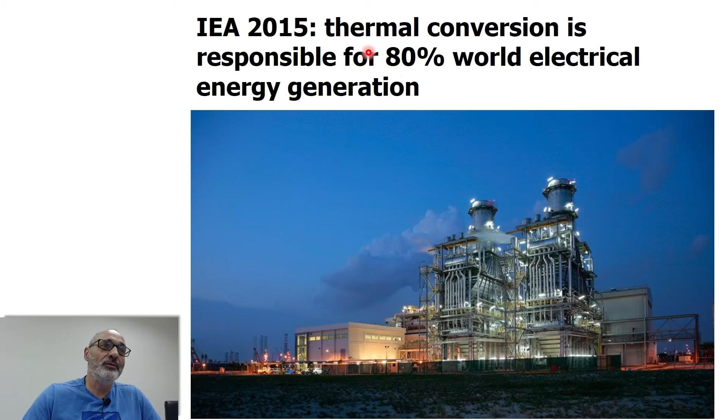Okay, so why this is so important, why I said that this is a very important subject. You know that most of our electrical energy, the world electrical energy consumption, comes from thermal conversion. I mean conversion of thermal energy into electricity by some special methods, which we will elaborate further on. Okay, so I just put this reminder here: 80% of the world's electrical energy generation comes from thermal conversion. Various types of technologies for thermal conversion, which I will try to elaborate.

Okay, to elaborate a little bit more on this subject, let's take this very recurrent figure. I'm going to be showing you this figure several times during this course. This is the U.S. energy use in 2013. Actually, this is a very interesting figure because first it's a Sankey diagram, so we have a very good idea of the sources and the destination, the uses of energy. Okay. And well, it's also representative of the world's consumption, the world average consumption, because you know the Brazilian grid, the Brazilian matrix, as we say here in Brazil, is kind of different. So that's why I use sometimes these kind of pictures.

So you can see in a Sankey diagram, you have the energy sources: solar, nuclear, hydropower, wind, and so on. And on the right, you have the destinations, or the sectors that are consuming energy. You see the residential sector, commercial, industrial, and transportation. So when you look at electricity generation and when you look at the sources, first of all, you see that you have nuclear energy, which is also a thermal source. You have hydropower and so on, which is not a thermal source, okay? And the same thing you can track, for instance, the using in industry. You use a lot of natural gas in industry. So that's how you interpret this kind of graph.

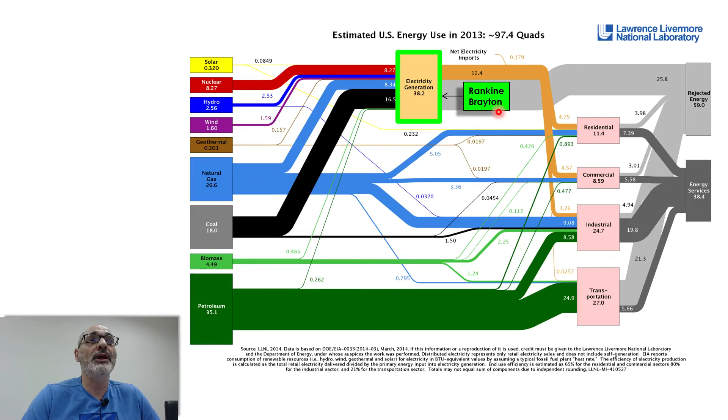But if you look at the sources of electricity generation, the main sources, you see nuclear is a non-renewable source. In a strict sense, it's non-renewable, but you have supply for thousands of years. Okay, but you see, natural gas and coal are non-renewable sources, and they play a very important role in electricity generation. You also have hydropower, wind power, and a little bit of biomass here, which are renewable sources

for electricity generation. If you look at the transportation sector, which is not electricity, but also uses thermal cycles like the Otto cycle, the diesel, or even the Brayton cycle, the major contribution comes from petroleum. So petroleum is essentially a fuel source for the transportation sector. You see a very small amount of electricity being used in the transportation sector, 0.0257, which is for electrical trains, for instance, like it is shown here. So you see that you have a lot of thermal conversion here. Also here, see what's not thermal conversion is electricity and possibly wind, but it's not significant.

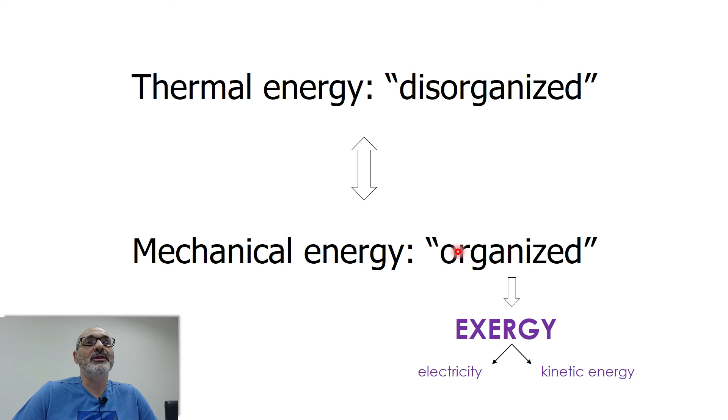So what is the problem when we try to engineer systems for this conversion? We're going to answer this today, and it's related to the second law of thermodynamics, which I'll show you in a few slides. It's also related to what we call the arrow of time - the fact that time always moves forward is related to a certain limit on the efficiency of this conversion. That's a quick glance at what we're going to see further on.

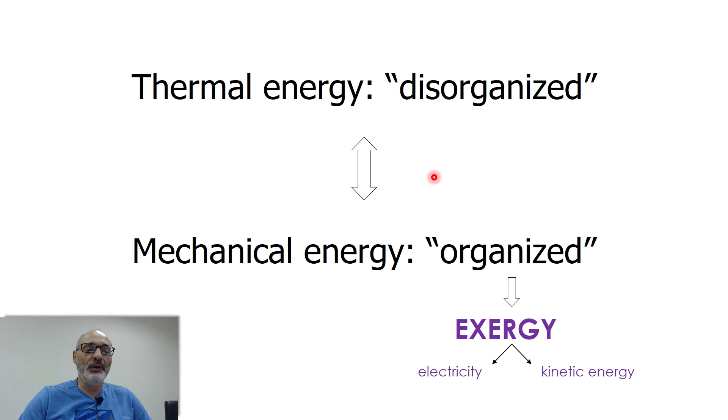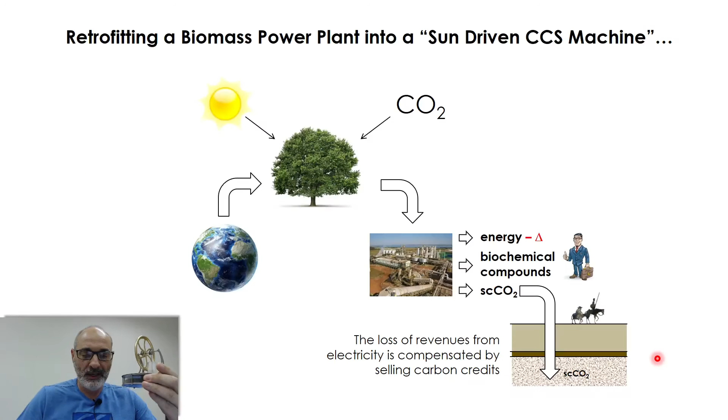I also want to show you a demonstration of thermal conversion. I brought this small machine here - I don't know if you can see it. This is actually what we call a Stirling cycle - a Stirling machine, a machine for the conversion of thermal energy, which may be coming from the person's hand here. It takes heat from the hand of the person holding the machine and converts this heat to kinetic energy.

I brought some hot water, and I'm going to show you how this works in a few seconds, because if I use the heat of my hand it's going to take a while for the machine to start turning. I'll leave it here for a while and move on, then stop to show you the machine working. Heat is being converted - heat from the hand or from the bottle, I hope you can see it here. Let me see if the YouTube viewers can see that. Yes, they will. So heat is being transformed into kinetic energy, and that's the subject of today's class.

We're going to write down all the equations and so on. Let me see if it's already turning. Yeah, so you see it's getting heat from the hot water, and it's not working yet, but it will in a few moments. I'm going to move a little further, then stop to show you the demonstration.

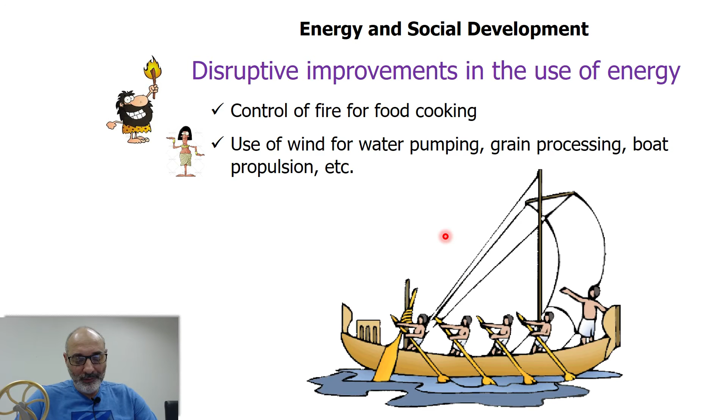And if we leap to only 200 or 300 years from today, we see that during the Victorian era, we learned how to do this conversion of thermal energy, which is a very abundant and easy to get source of energy, to work. When I say work, I mean force times displacement, mechanical energy. Okay, so we learned how to do that during this period. We're going to see that in a little while.

And after learning how to convert heat to work, we developed general purpose engines, also machines like mechanical looms, tractors, excavators, and so on. This evolution here actually revolutionized our society. Okay, the control of fire represented a revolution in our evolution. You know, I said in the first class that even our brain was configured differently because we had access to a lot more food. But these changes here during the Industrial Revolution actually completely revolutionized our society. I'm going to show you that in a few slides.

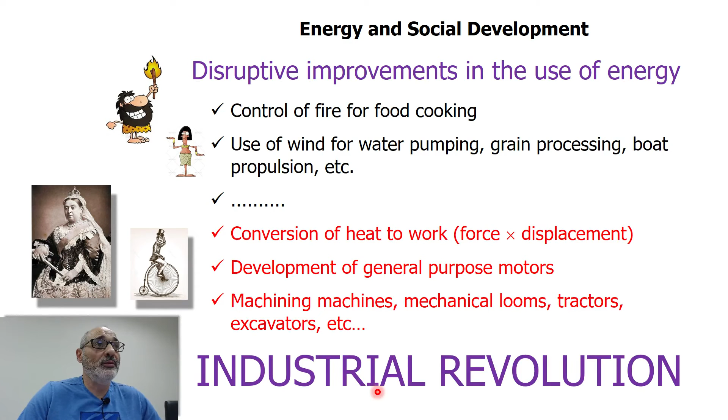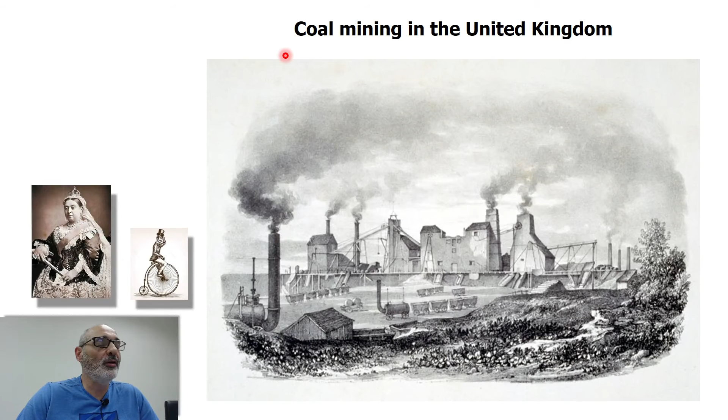Okay, so coming back to our slides and moving on, these changes here resulted in what we call the Industrial Revolution, one of the aspects of which I want to focus on, thermal energy conversion. We could say that it started in the United Kingdom, in the coal mines. Now you see it here. The problem in these mines was that you start digging deeper and deeper, as you can see here. As you started to dig deeper and deeper to get coal, water started to seep and accumulate in these galleries. So you have to have some kind of system to drain this water from the underground in order to enable the miners to work and to get the coal.

Okay, so in the beginning, this water drainage was done by animals or even by humans, but as these mines started to grow, animals or man didn't have enough power in order to remove the amount of water that was increasing and increasing. Okay, so the first thermal machines were developed. As you can see here, we're going to see the machine, a cable which goes down to the mine, and you see the coal here being fed to the thermal machine.

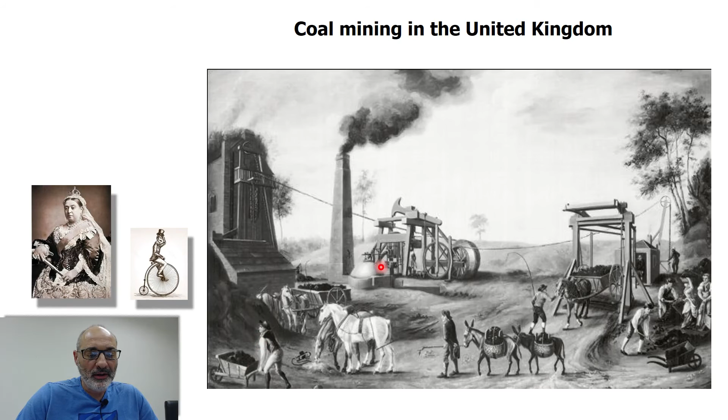The first of these machines was Thomas Savery's machine. The important point is the date, 1698. Actually, it was a very strange machine and a very inefficient machine, but it was better than having, let's say, 100 horses side by side trying to pull all the water that was seeping into the mine. Actually, this machine by Thomas Savery is a vacuum machine, so it's different from this machine that I'm showing you here, and it used the vacuum produced in different chambers. So in this chamber here, you produce vacuum, and this low pressure actually sucks the water from the bottom of the mine. We can see this effect also in Thomas Newcomen's machine, which is a little bit better than Thomas Savery's machine.

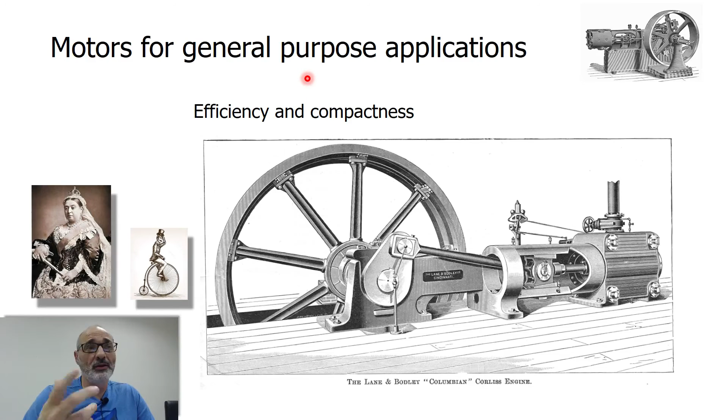Okay. So moving further, when Watt managed to develop a very efficient machine, what this caused was the development of general purpose engines, like this one in the picture here. By general purpose, I mean engines suitable for application in the transportation sector and so on and so forth. And this actually represented a very, very important revolution.

First, in the transportation sector, you can imagine the revolutionizing effect that a tractor represents for agriculture, for instance. You can do the calculations. What is the amount of work that a horse can produce by pulling a plow, for instance, for plowing the soil? You can multiply that by 10, by 50. That's the capacity of a steam tractor. So this represented a very important increase in food production. Actually, the historians say that Thomas Malthus' bomb was disarmed by the invention of the steam tractor.

Also, navigation. You know that before the use of steam, you had to rely on wind power for the propulsion of boats. So you need wind to go from A to B. You always need wind. If you have steam, you don't need wind. You need some fuel, wood or coal, and that's okay. You have a lot of coal, but also a lot of wood, and you also could navigate through rivers.

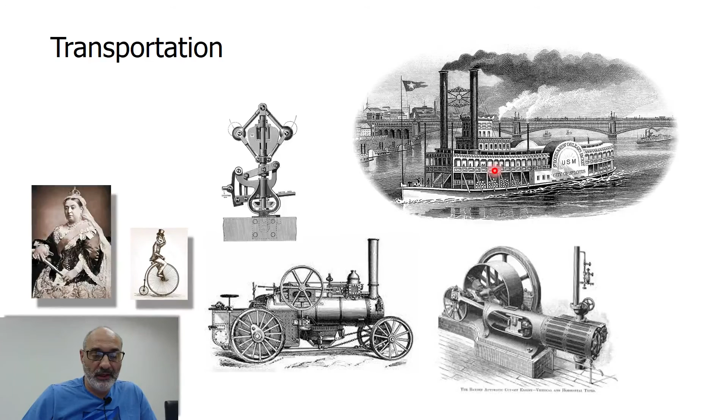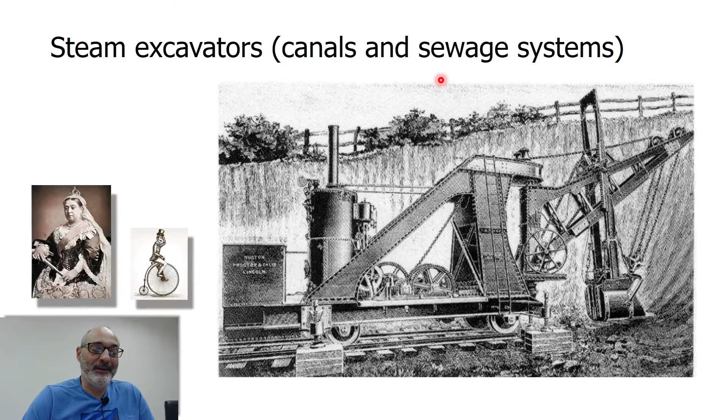and also in terms of health. Can you figure the impact that a steam excavator had in the cities? Because with steam excavators, you were able to build canals for draining sewage, and this represented a very positive impact on people's health. Also, the use of steam excavators enabled the construction, as you see here, of the Suez Canal in 1869. And with the Suez Canal, you don't have anymore to go from United Kingdom to

India, for instance. You don't have to go all the way down to South Africa and then to India. You just shorten your trip by, I don't know, 6 months or 1 year. I don't know. I'm inventing numbers, actually. Okay, and not only the Suez Canal, but also the Panama Canal in 1881.

And you see the picture here of a steam excavator. These constructions, the Suez Canal and the Panama Canal, represented major engineering feats at the time, and it wasn't possible without this kind of machine. The story of the Panama Canal is very interesting. If you have the opportunity of watching a documentary or something like that, it's a very, very interesting thing to see,

the construction of the Panama Canal, because it's closely related to politics. You see here, the country called Panama was created because Colombia didn't agree with the United States; they didn't want to let the United States build the Panama Canal. Okay, so there are interesting stories about that, and also related to the plague, to yellow fever.

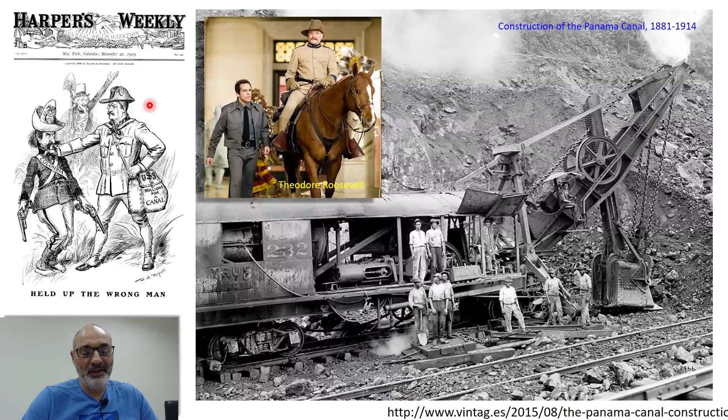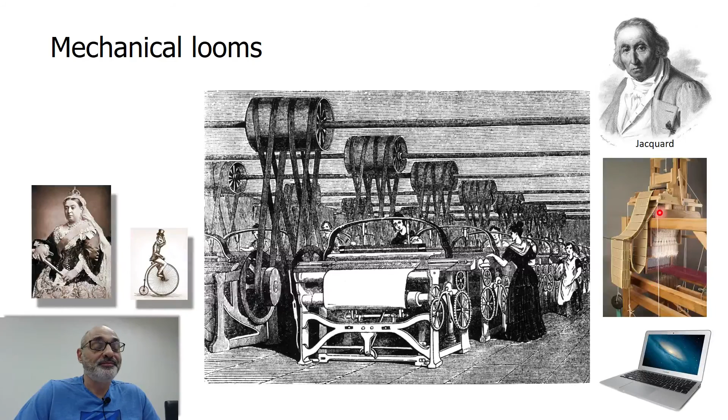And that started with Jacquard, a French guy who developed the programmable loom. The drawings that you want to put on the tissue were programmed in punched wood cards, like the first computer's punch cards. The programmable loom is a machine where, if you change the program, the set of cards here, you change the figure that's going to be drawn here, okay? And that's exactly what the computer does. So the development of the mechanical and programmable loom led to the development of the computer, okay?

But let's try to generalize a little bit what we have said already. Remember, I'm talking about the disruptive improvements in the use of energy. So I'm talking about exergy, which we can think of as mechanical work or electricity or kinetic energy, for large-scale production of goods, food, clothing, utensils, etc., and for broadening the access to services such as transportation, illumination, heating, etc. Okay, so what do you think this represents in terms of social changes? This is possible only because you have this kind of thermal machine, a machine that is capable of converting thermal energy to mechanical work.

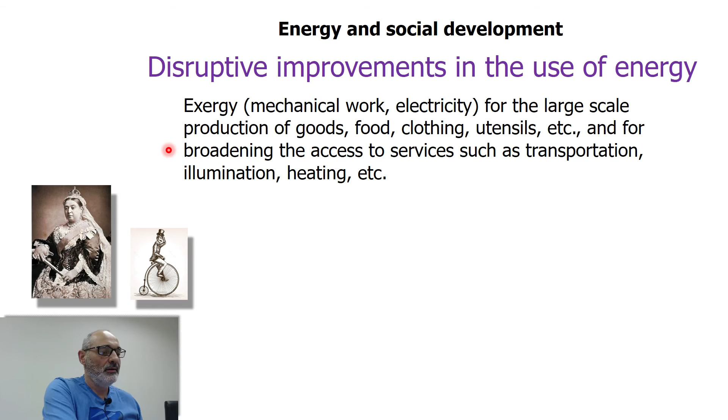Okay, so this led to what we call the Industrial Revolution, which led to a better quality of life. And by better quality of life, I mean in an objective sense, because this can be measured through longevity, education, and income. So all these consequences led to higher longevity, better education, and an increase in people's income. So you can quantify that through the HDI index.

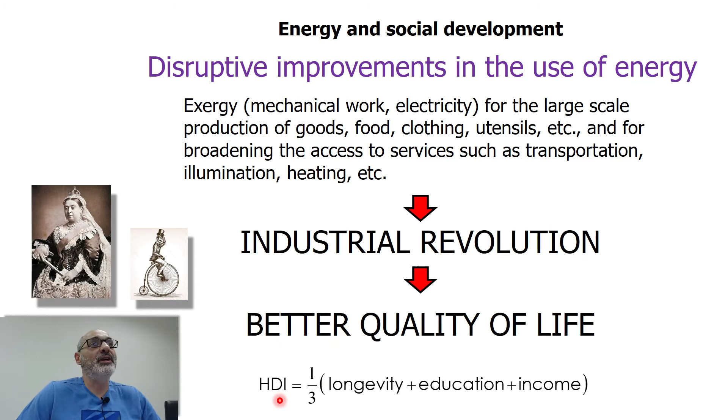But we're talking about energy, we're talking about its social impacts, we're talking about how to convert different types of energy. But, you know, what is energy? That's a very interesting question. If you look in books and even good references, you often find this kind of definition: it is the capacity to do work, and by work we mean force times displacement, or torque times rotation, okay? So this definition actually represents a problem, because work also is energy. It's mechanical energy. So it's like saying that energy is energy. So this actually does not answer our question. So I want to discuss this subject a little bit.

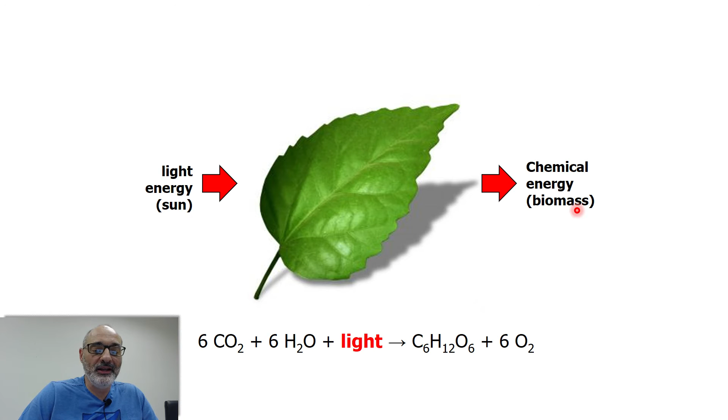And that's why, since we managed to control very, very huge amounts of energy, we managed to make very, very huge transformations. Okay, and this is done in nature in many kinds of applications. A leaf, for instance, does exactly this. It captures the energy of the sun, transforms that into biomass, for instance, and well, you also have some consequences, let's say like that. Okay, so it's a transformation. Energy associated with light is transformed into energy associated with biomass. Okay, also cells fermenting can do that.

Okay, let me go quick here. We do that in our bodies. Right? We take chemical energy and we transform it into available energy for moving our muscles and for respiration and so on. And we also lose thermal energy here. And this is exactly what an internal combustion engine does. It's actually a very similar combustion reaction. You take chemical energy from your fuel, you transform this chemical energy to mechanical energy in the axle here. Okay, it's going to be transformed into kinetic energy, but you also lose thermal energy.

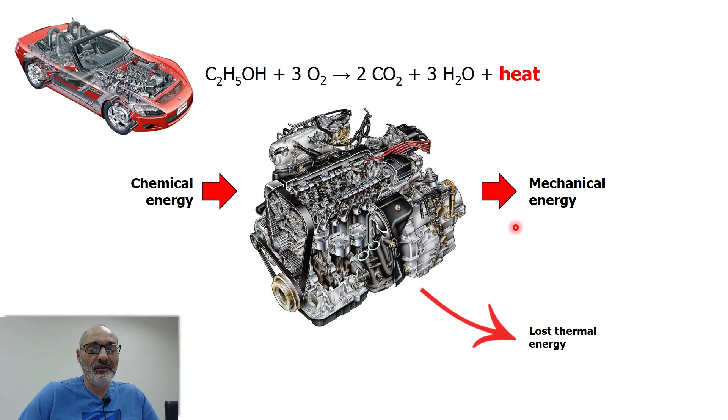We're going to see that it is impossible not to lose some amount of thermal energy, because we know that energy must be conserved. So the ideal scenario would be to convert 100% of this chemical energy to mechanical energy without losing any kind of energy. This would be a 100% efficient conversion, but I'm going to show you that this is impossible.

The first person that tried to study that was Joule. I'm sure you are aware of this, what they call the mechanical equivalent of heat. By heat I mean thermal energy. Actually, Joule constructed this machine.

By allowing this weight to decrease its height, it pulls the rope here, it turns the blade, the agitator inside the calorimeter, and by supplying a certain amount of mechanical energy, gravitational energy, this resulted in an increase in temperature. Consequently, an increase of thermal energy of the water surrounding the blades here. So in this experiment, work is totally converted to heat, to thermal energy. And the equivalent calculated by Joule is given here.

The important question is, how can we do the transformation in the opposite sense? Of course, this type of machine is not going to work, but we can always build something like this. And the question is, is it possible to convert 100% of heat to mechanical work? So let's see in more detail how it is done in Newcomen's machine. Let's see the specific cycles in order to try to answer this question, if it's possible to convert 100% of heat to work.

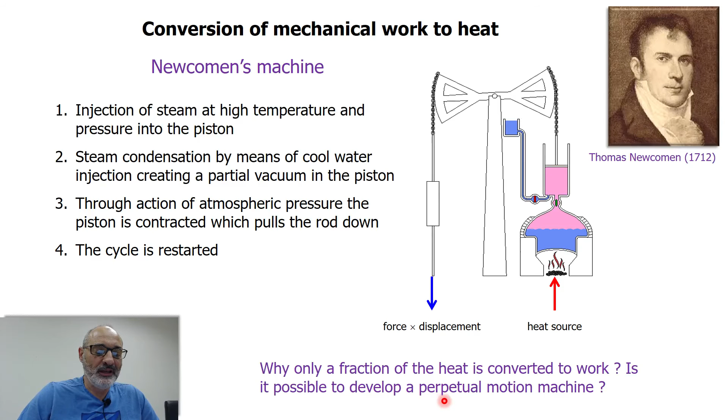I'm going to show you that if it was possible to convert 100% of heat to mechanical work, it would be possible to construct a perpetual motion machine. And this actually is related to the second law of thermodynamics. Just as a reminder, the first law of thermodynamics is related to energy conservation, and the second law is related to the efficiency of the conversion of heat to work. We're going to see that in a few moments.

A very important person in all this development was Nicolas Carnot, a French military cadet, and actually he asked himself the right questions, and he obtained very significant and consequential answers. First, he recognized that heat is a form of disorganized energy. He also recognized that work is a form of organized energy.

This is the important part of Carnot's work. He demonstrated that work can be 100% converted to heat, but he showed that heat can be only partially converted to work. This is astonishing and, let's say, surprising at the same time. I'm going to show you that.

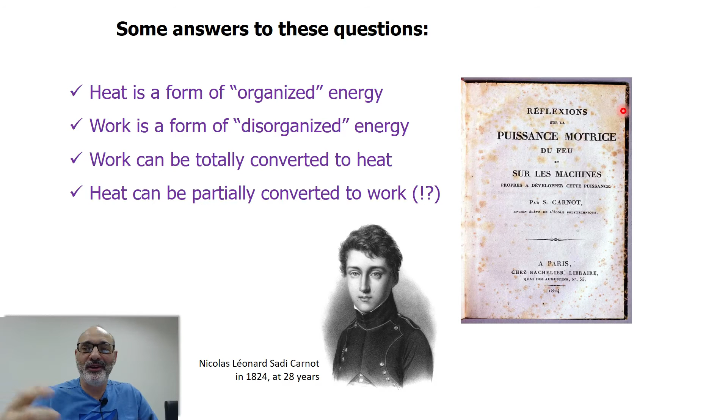This is Carnot's work. The title is very interesting: Réflexions sur la puissance motrice du feu. Reflections or thoughts about the motive power of fire. We're going to come back in a few moments to Carnot's thoughts. But actually, it's a very sophisticated and elaborate thought.

Okay, so these particles have individual velocities, but the resulting center of mass may also have a velocity, or what we call macroscopic velocity. The macroscopic forms of energy are associated with the system center of mass relative to an inertial referential. So it's the well-known kinetic energy.

Sorry, it's half Portuguese, half English here.

So we have kinetic energy and also potential energy. V stands for the velocity of the center of mass, and Z is the height of the center of mass. So these are actually organized forms of energy.

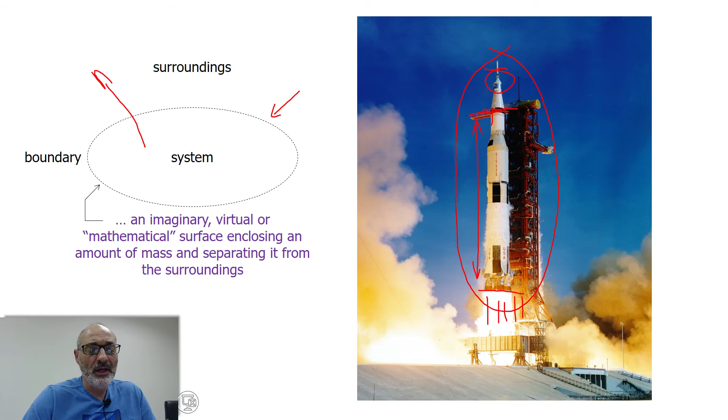Our system is the rocket, I mean the fuel. From the bottom to here, all this is fuel, energy storage, and this is the payload. So this is a system, and one important aspect of this particular system is that you have mass flow through the boundary down here. This is what we call an open system. Just to be clear, an open system is a system in which you have mass flow through the boundary. We're going to do our energy balances on this open system.

So there's our system. Let me get my pointer. This cloudy form here is the imaginary surface that defines the boundary of the system. You see that you have energy flows through the boundary in the form of heat and work, energy entering and exiting the system, but you also have mass flows through the boundary. With the entering flow and the exiting flow, you have energy being carried inside and out of the system, associated with thermal energy and also what we call flow work. Why is that? Let me give you an example.

You can suppose that you have a pool, and you have hot water, a heated pool. You have hot water entering here. So even though the temperature of the pool is, let's say, 25 degrees, you may have hot water entering at 60 degrees here. So this water comes with a high amount of thermal energy, which will be dispersed, which will be used to heat all the water that is confined in the pool. So that's how thermal energy is associated with this input mass flow.

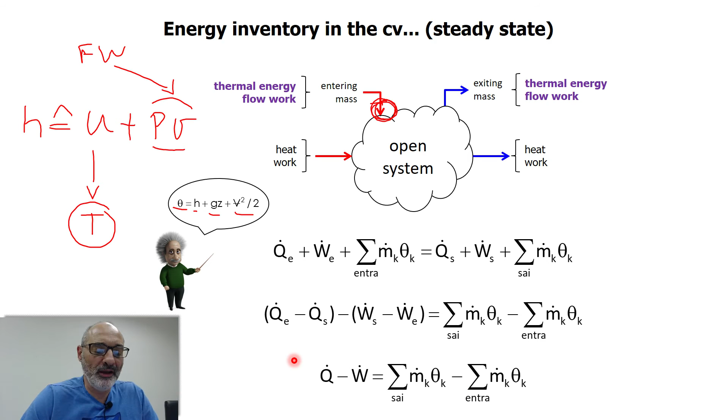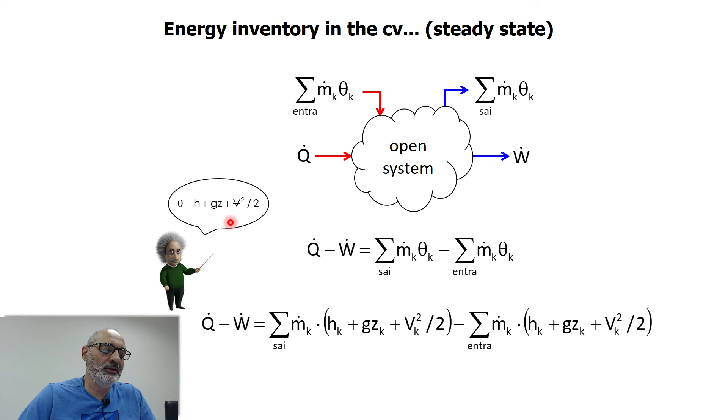Don't worry if you're not used to this law. I'm going back some slides, it's only an inventory. It's a mathematical formulation of this kind of inventory. So don't bother with the mathematical representation of the first law, and just write it down according to the definition that we have made here.

So we're going to try to apply that in the thermal machines. An important aspect to observe here is that our thermal machines have evolved a lot since the first ones in the 1700s to today. So how did these very inefficient machines evolve into these very, very efficient machines, which today, as I said, are responsible for 80% of all electrical energy generated in the world.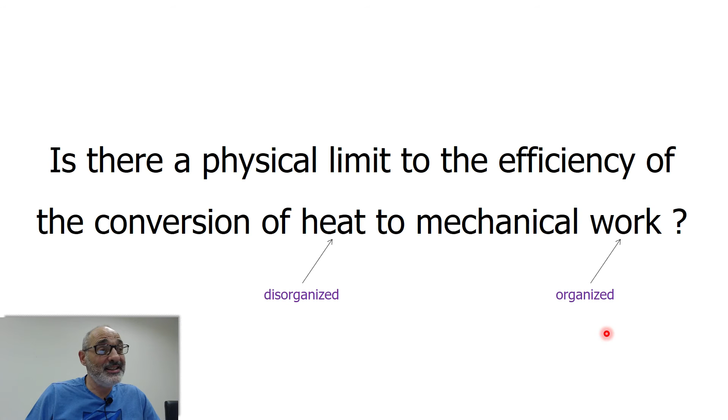So the important question is: is there a physical limit to the efficiency of the conversion of heat to mechanical work? Let me start again. Is there a physical limit to the efficiency of the conversion of disorganized forms of energy to organized forms of energy? I hope I didn't mess your minds up. And that's what I'm trying to show you now in a few moments.

What do I mean when I say that the laws are symmetrical? In this situation, if we try to generate this graph here, or the movement, the angular position of the pendulum, theta, we can start at t equals 0 and integrate this equation. So we start here, and we are able to reproduce this trajectory. If we invert time, if we consider that time is flowing backwards, it's exactly the same thing. The movement is not going to change. Now it's spinning in the counterclockwise sense. We're going to start from the right and integrate to the left, because time is flowing backwards now.

And what we see is that this t here, which stands for time, is flowing backwards, but the mathematical equation does not change. So that's what I mean when I say that all physical laws are symmetrical with respect to time. Except one: the second law of thermodynamics. And this is related to that efficiency that I was talking about. So what is the second law of thermodynamics?

First of all, there are several ways of formulating the second law of thermodynamics. I'm going to give you one type of formulation which is very useful for conceptual reasoning, but it's not very useful for, for instance, engineering calculations. But it's very simple to understand. You just follow me.

The second law of thermodynamics is related to the spontaneous or natural transformations, like the flow of energy. In other words, the flow of energy is a kind of transformation. We know that heat flows naturally, spontaneously, from high temperature to low temperature. You don't need to do anything. This is going to happen without any interference. So when you have a thermal source at high temperature and someone to receive this energy, we call that a heat sink. So you can see that there is a natural spontaneous flow of energy.

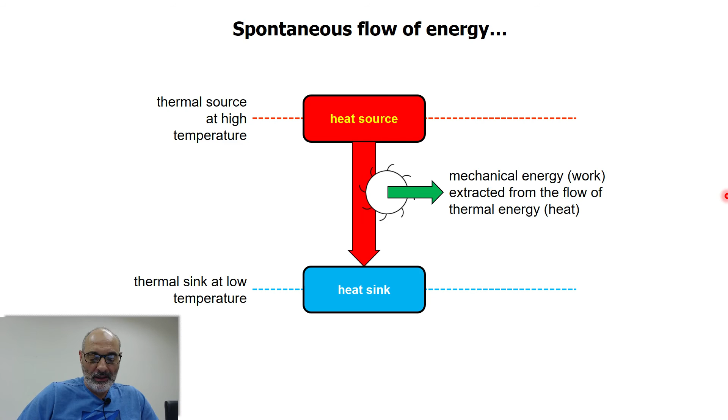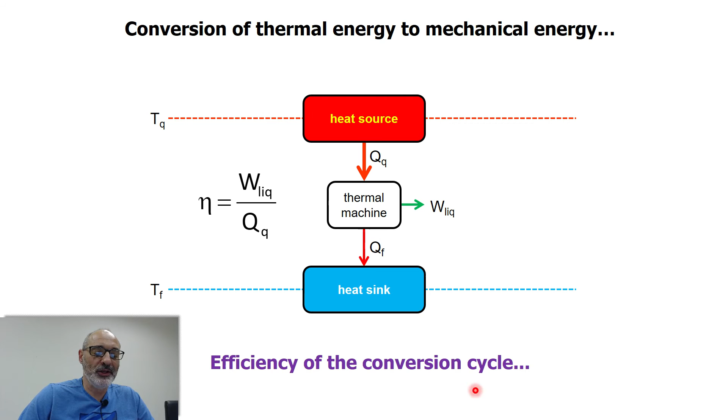And the definition of this conversion, we're going to define by eta, equal to the surplus exergy divided by the amount of heat that I drain from the heat source. Think in terms of a power plant. This is the electricity injected in the grid from which we obtain revenues, and this is proportional to the consumption of fuel. So this is the definition of the cycle efficiency.

As I said, W is equivalent to the work performed in the past by a certain number of horses, and that's why we use the word work, because this surplus mechanical energy in the numerator replaces a certain amount of work done by horses or men, even men. So that's why we use the word work, and that's why we use as a power unit what we call horsepower. This comes from this period here, and the denominator is proportional to the cost, to a certain amount of coal used in those very ancient Watt's and Newcomen's and Thomas Savery's machines.

And as I was explaining, the word work and especially the unit horsepower is actually a concept developed by Watt in order to facilitate his sales. He was a very clever guy and a very good scientist actually. He wanted to sell his machines to these coal mine owners, and from the perspective of the person who's going to buy, what he needs to know is what size of machine do I need to replace, I don't know, 700 horses which I have in my coal mine. So there needed to be a certain type of equivalence between an animal, a horse, and a unit of power.

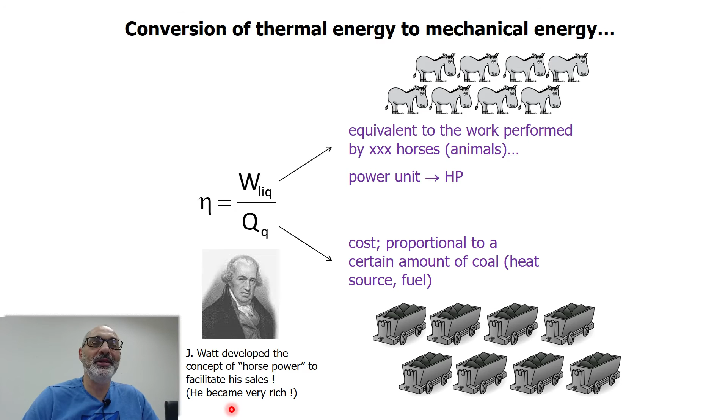Okay, and also an observation: James Watt became very rich. In addition to being a very, very good technician, he was a very good salesman, actually. So as I was saying, the quest for maximum efficiency is motivated by, let's say, greed. You want to produce the biggest amount of horsepower, of surplus exergy, with the minimum amount of fuel. That was, let's say, 200 years or 150 years ago.

But today, the quest for maximum efficiency is especially motivated by climate change concerns. What we want to do now is to replace these fossil sources by renewable sources. We also want to burn as little fuel as possible, because this has environmental and social consequences, and so that's another good reason for searching for maximum conversion efficiency.

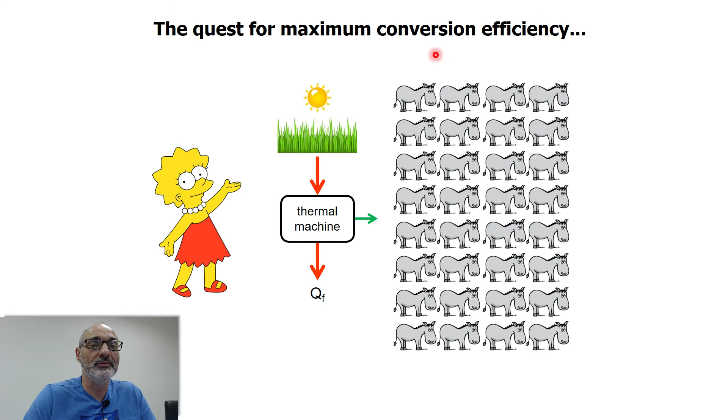But the problem is, how do I know if my machine is close to this maximum efficiency or not? Because if it's close to the theoretical maximum, I know that, well, that's nature. I cannot do better than that. But in order to calculate that, I need to understand how exactly a thermal machine works. Okay, I'm going to explain.

So, taking back our reasoning, that's our thermal machine. Inside here, you have a working substance executing a cycle. This working substance absorbs heat from a heat supply. It rejects heat to the environment and it exports some amount of exergy. The heat supply can come from a combustion reaction, as we're going to focus on this class: coal, oil, gas, or biomass. So these are all thermal power plants, but you also can have heat from a nuclear reaction or from the sun. We are going to have a specific class on this subject.

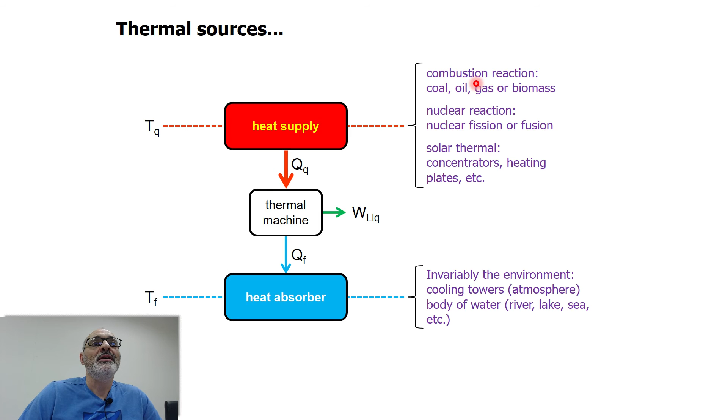Okay, and when we talk about thermal power plants, the heat absorber is always the environment. It's the atmosphere or some body of water like a river, lake, or sea, but it's always the environment. I'm stressing this point because you cannot control the temperature of your heat absorber. You cannot control the temperature of the atmosphere, for instance, but you can control the temperature of your heat supply by controlling, for instance, the combustion temperature. So if you want to produce more work with less heat, you need to increase efficiency.

So looking inside the thermal machine, the working fluid executing a thermodynamic cycle can be something like what is shown here. Let's consider, for instance, steam. The working substance is steam. So what do you need to do? You need to get cold water. It's going to absorb heat from the combustion, so the cold water is going to be transformed into hot steam. So you have a phase change in between.

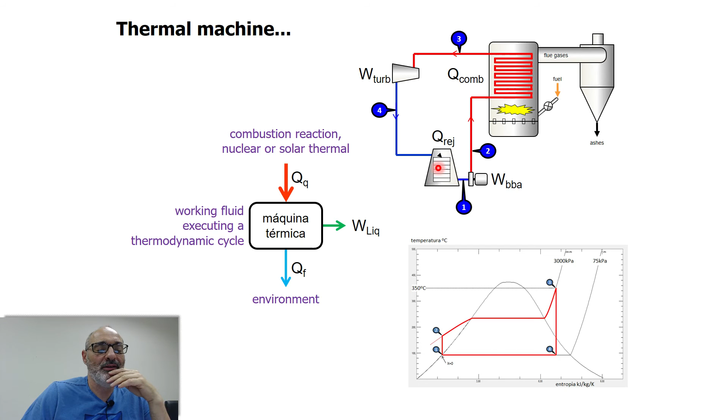So if I have a cold liquid, which is heated in your heat supplier, in this case a boiler, and then you extract work in a turbine, and then you can reject the amount of heat that has to be rejected in a cooling tower, for instance. In this case, you have a pump in order to increase pressure. In the pump, you increase pressure, but not the temperature. So you have cold water here at high pressure. In 3, you have high pressure and also high temperature water that has been transformed to steam. After the turbine, you have low pressure water, still possibly in the form of steam or a mixture of steam and liquid. So low pressure, but still high temperature. In order to cool down this low pressure, high temperature water, you have to reject some amount of heat here, and that's related to the maximum efficiency.

Just to show you some of these equipments, here are two sugarcane boilers from the Bevap sugar mill in Minas Gerais, near Brasilândia de Minas, which is in the northwestern part of Minas Gerais. You have one of the conveyor belts feeding sugarcane bagasse here. Here is the furnace, and all this is the equipment for removing particles and so on, in order to retain all that you cannot emit to the atmosphere.

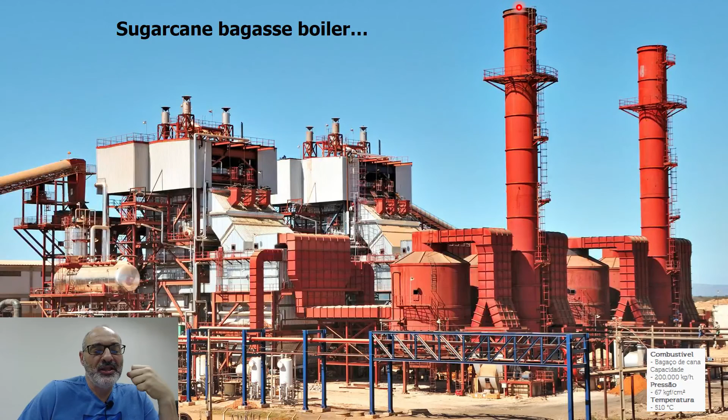Okay, the turbine, if you're not used to this kind of equipment, you can think of it in terms of a windmill. So a turbine is a kind of windmill for steam. It's going to remove some of the kinetic energy of the steam, but also some of the thermal energy of the steam. A windmill only removes the kinetic energy of the wind. So it's a kind of windmill for steam.

The element that rejects heat to the environment can be cooling towers, as in this power plant. So you have hot water in contact with the atmosphere, so it's going to reject heat. It's also going to evaporate. So what you see here is not smoke, it is steam.

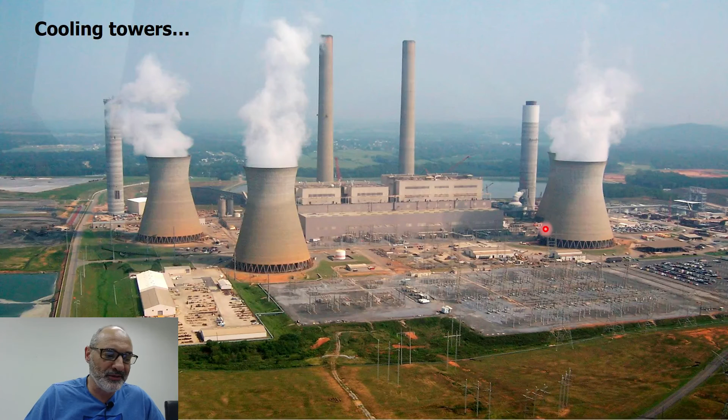Well, so those are the main elements, and the pumps are very small pieces of equipment, so it's not worthwhile showing them to you. Okay, so let me elaborate on the second law of thermodynamics. I'm going to present what we call the Clausius statement of the second law of thermodynamics, and also the Kelvin-Planck statement. These formulations of the second law say what is possible and what is impossible. That's very interesting because you're not going to use these formulations quantitatively, but they are very rich in terms of interpretation.

Okay, so let's see Clausius' statement of the second law of thermodynamics. What he says is that for heat flowing from a low temperature reservoir to a high temperature reservoir, it's not possible to obtain this flow without the expense of some amount of work, some amount of exergy. This means that heat is not going to flow from a low temperature environment to a high temperature environment spontaneously. You have to force that in some way, by some means.

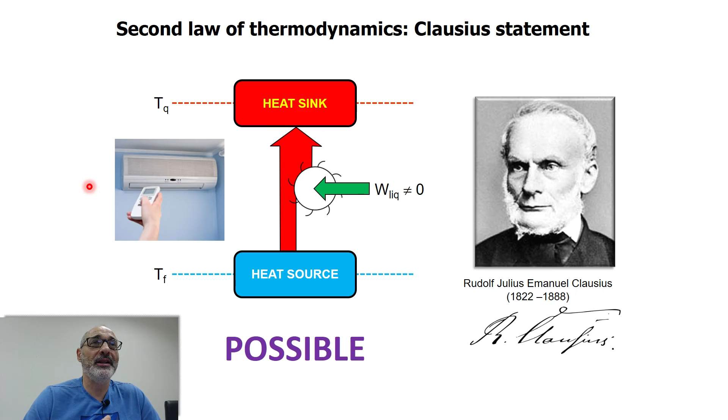So what Clausius says is this is not spontaneous, so it's impossible to obtain that without the expense of some work. As I said, if you want to produce this flow from a low temperature to a high temperature sink, you are going to have to expend some amount of work. That's exactly what happens with your air conditioning equipment. This is more or less natural for all of us because we have experience with this kind of thing, so it usually does not surprise anybody.

The other formulation of the second law is less intuitive, but it is completely equivalent. I'm going to prove that to you. So what does the Kelvin-Planck formulation of the second law of thermodynamics say? Well, it says that it is possible to obtain work from heat flowing from a high temperature reservoir to a low temperature reservoir. This is natural. This is okay. This does not violate any physical law. But it says that something else is impossible.

It is impossible to convert 100% of the heat absorbed from the heat source to work. You have to reject some amount of heat here. It's impossible to have zero rejection down here. And this is a lot less intuitive. Many times I teach this in an undergraduate course. When I show this and ask the students, do you think this is natural? They ask themselves, well, why is this not possible? It should be possible. But I'm going to show you it's only wishful thinking.

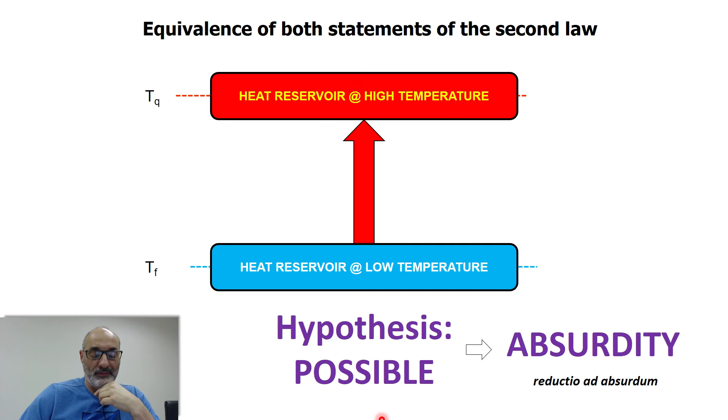I hope you managed to follow. So let's come back to the problem of searching for maximum conversion efficiencies. This is related to the Battle of Waterloo, or the Napoleonic Wars, in particular the Battle of Waterloo, where the Duke of Wellington defeated Napoleon in 1815.

I mentioned that Sadi Carnot was a cadet at the military school, and Carnot was a very clever guy. He recognized that one of the main reasons for the British victory was that their guns were better, their cannons were better, or on the whole, their industry was better. So Carnot decided to try to defeat the British in the future by developing better machines. That's really what motivated Carnot.

He tried to quantify the second law of thermodynamics, to formulate means of calculating this maximum conversion efficiency, because from Kelvin Planck's and Clausius' statements, we know that we have to reject some amount of heat.

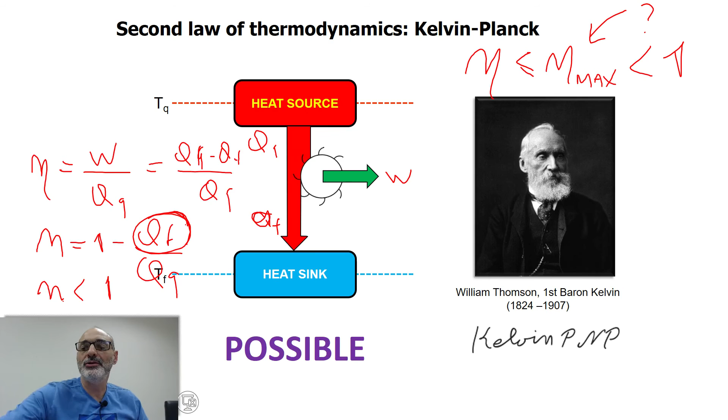So let's go back to Carnot, Leonard Sadi Carnot. What he did was think about our thermal machine as I was showing you. He started by recognizing that you have the system, which is the working substance inside the machine, the air inside the piston. You also have the environment, which is what is not the working substance. He recognized that when you invert the sense of the machine, you can have a thermal machine which exports exergy, but also a kind of air conditioning which imports exergy. We can call that a heat pump, for instance.

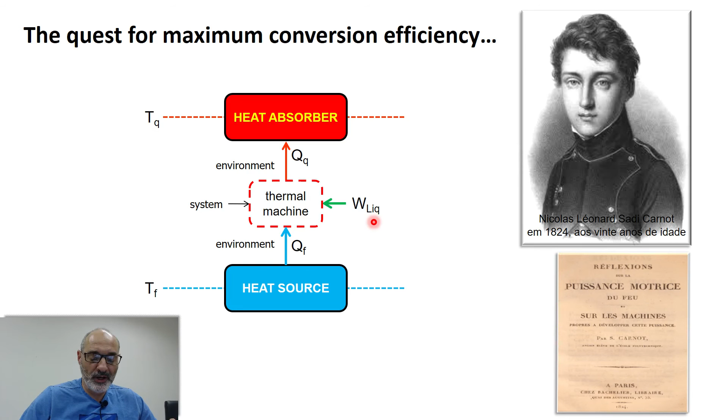And he recognized that the maximum efficiency occurs when the thermal machine is reversible. Let me go back a few slides. He was thinking about inverting the sense of the machine. If I invert the sense, I have a thermal pump here. His thought was that if by inverting the working sense of the machine the effect is nothing, this is a machine that has maximum efficiency.

So the maximum efficiency occurs when the machine is reversible. As he says in French, when you invert the sense of the machine, you have exactly the same thing. I'm going to show you that.

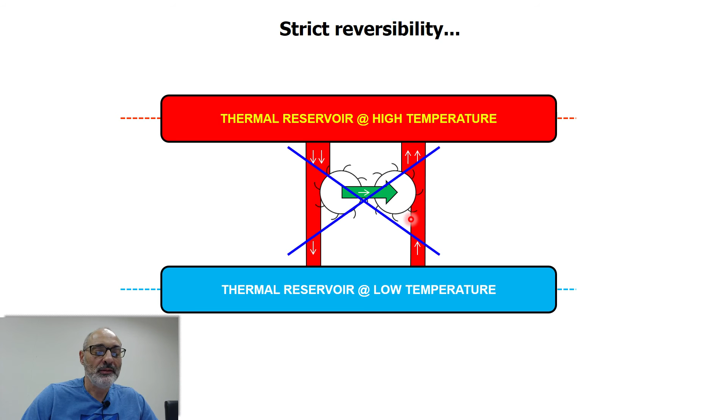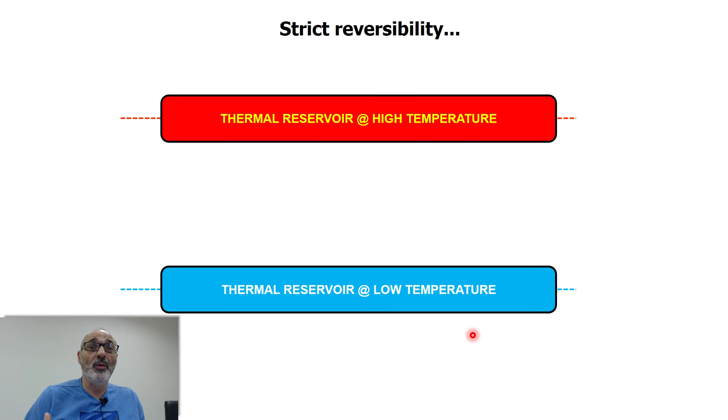Okay, so when the machine is reversible, when we invert the sense, all these quantities can be maintained exactly as they are. So when we combine the machines, when we use the thermal machine to drive the air conditioning, the heat pump, all fluxes of heat and work cancel out. So the effect is you have nothing, because they are all being canceled. So when this happens, you have a reversible machine which has maximum conversion efficiency. Okay, so that's the conclusion of Carnot.

Okay, so summarizing a little bit his conclusion, as I said, the maximum efficiency is always less than 1 for a temperature difference which is finite. Also, he showed that all reversible machines have the same efficiency. You can have different reversible machines. This is a Stirling machine, which happens to be theoretically reversible. Carnot's machine, which I'm going to show in the next slide, is also reversible. So they are very different machines, but they have exactly the same theoretical conversion efficiency.

He also showed that all non-reversible machines have smaller efficiencies. So all irreversible machines are less efficient than any reversible machine. And he also proposed a means of calculating the maximum efficiency, which is the efficiency of the reversible machine. This formula actually was originally proposed by Carnot, not in this way, something like this. Let me use this area here. The maximum efficiency you calculate as a certain function of the temperature of the cold reservoir divided by a function of the temperature of the hot reservoir.

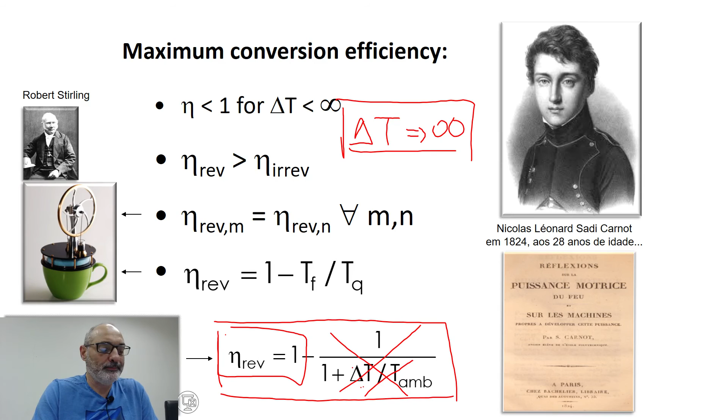So also Carnot proposed a thermal machine that is reversible. I showed you the Stirling machine, which came a lot later, proposed by Stirling, but at that time, he proposed a thermal machine, which is not applicable in practical applications, but it represents a very good reference for our studies, for our comparisons. So let's see what is Carnot's thermal machine. He proposed a reversible thermal machine executing this cycle. First, you have the working fluid here, executing these 4 transformations.

Let's start here. You're going to absorb heat from the boiler here. So my working substance is going to absorb heat from the boiler or from the heat source at constant temperature. So if I make a graph like here, a graph of temperature in terms of entropy or pressure or volume, I can use any pair of properties. There's no problem.

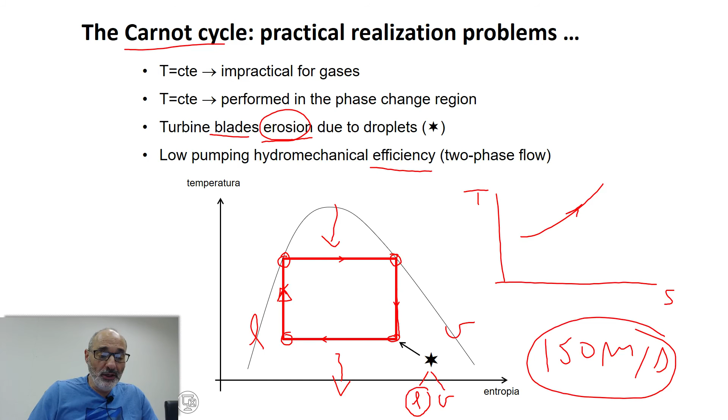So the end of the story is that the Carnot cycle executed like I'm showing you here is not practical. You could implement the Carnot cycle like this, so you solve the problem of pumping a multi-phase flow or blade erosion. Here you have steam, and here you have only liquid. The problem with this implementation of the Carnot cycle is to have very, very high pressures here, something like 10 to the 5 bar. Let me just make a drawing here for you to have an idea of how high 10 to the 5 bar is.

If you have, let's say, a steel plate, 1 centimeter thick, and you have a water jet at, let's say, 4,000 bar, this water jet is capable of cutting this steel plate. Actually this is one way of cutting metals, with very high pressure water jets. So 10 to the 5 bar is really an impossible pressure, so it's not practical for these reasons.

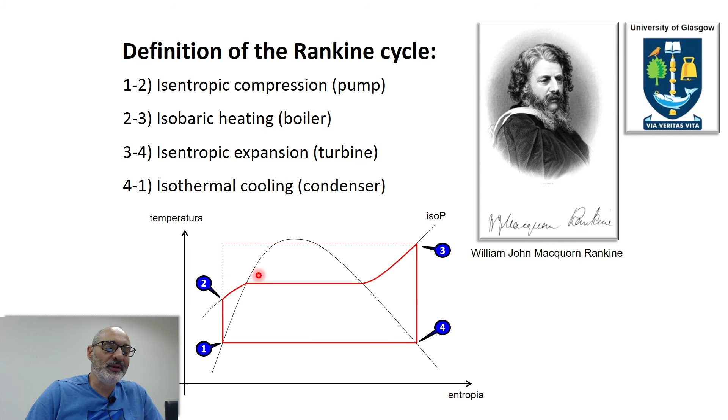Isentropic expansion at the turbine, that's exactly the same as in the Carnot cycle, and isothermal cooling at the condenser. This is exactly the same as in the Carnot cycle. So the Rankine cycle is the closest that we can get to the Carnot cycle because of these practical limitations that I mentioned before. So let's see some applications.

I want to be able to make some calculations with you, and actually we're going to compare the best way of, let's say, exploiting, transforming, getting exergy from a thermal source by comparing 3 types of cycle. Actually 4, because we always have the Carnot cycle. So first we're going to analyze a steam cycle, then a gas cycle, then a combined gas steam cycle. We're going to make these calculations.

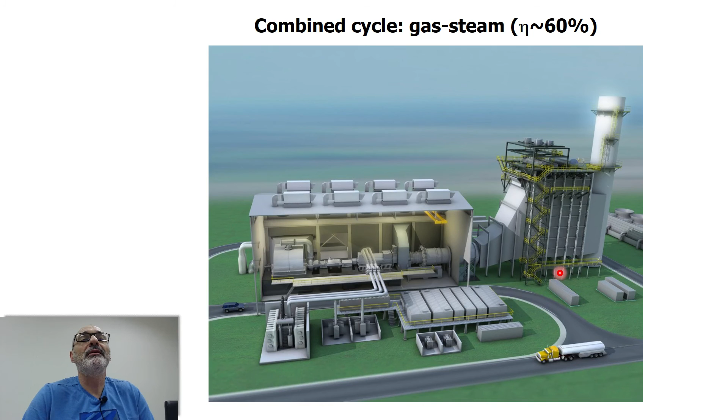Professor, I have a question. What is the temperature of superheated steam? Yeah, we're going to calculate that in a few moments. But typically here, superheated steam, 300 degrees, 400 degrees. We're going to calculate that in a few moments.

So what we're going to do to compare all the possibilities is to compare different types of implementations. So we're going to state, let's say, a benchmark problem. We have a heat source at a certain temperature. We also have a heat sink at a fixed temperature. So TQ and TF are fixed. And what we can do in order to increase efficiency, since we cannot decrease the environment temperature, is to always try to increase the temperature of the heat source. The ambient temperature we cannot control, and the higher temperature, the temperature of the heat source, cannot be increased to infinity because you have material limitations or practical limitations.

Not only material. For instance, if you increase too much the temperature here at this point, because as I showed, you have interest in increasing the temperature here in order to have higher efficiencies. But if you have temperatures, let's say 2000 degrees here, the nitrogen present in the air is going to start to react, and you're going to obtain nitrogen oxides, NOx, which will be exhausted here and are very, very dangerous pollutants. So you cannot emit that in significant amounts. So the higher temperature is limited due to several reasons: material resistance, concerns about pollution, and so on.

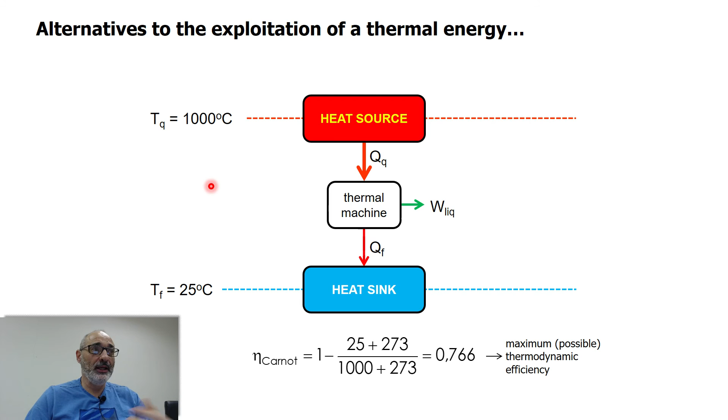So we're going to make different implementations, a Rankine cycle, a Brayton cycle, a combined cycle, and we're going to make all the calculations. Let's first start with a Rankine cycle. As I showed you, this is the temperature-entropy graph for water.

We're studying the Rankine cycle, as the temperature for the superheated steam is too much for a Rankine cycle. Okay, but just in order to be coherent, in order to be able to compare all these implementations, I'm assuming that we are going to build this machine. So we start at 25, and the pressure is atmospheric pressure.

We start by compressing isentropically to a certain pressure. I'm not sure where the pressure is here, but it's going to be somewhere, because I'm going to show you the calculations. So we compress from 25 degrees, from 1 bar, to the working pressure at the boiler. Then we absorb heat to 1000 degrees. I have an observation: this is too much for a Rankine cycle. In practice, this is smaller than 600 or 500 degrees.

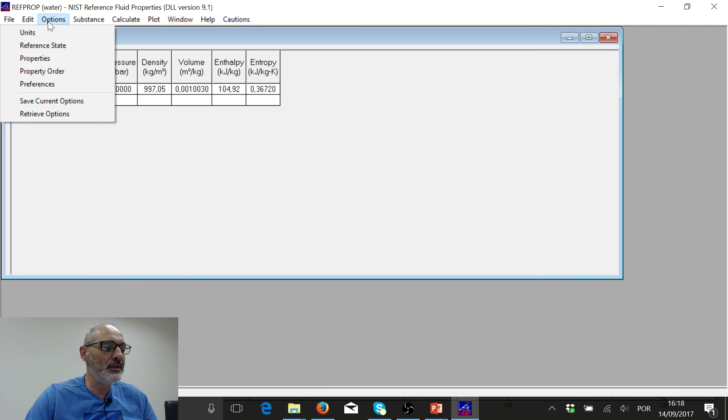When you use software like this, the first thing is you choose your substance. Among the pure fluids, you have a lot of different fluids that can work as a working fluid. We're going to use water. For instance, I want to know the enthalpy and the entropy of water at 1 bar, 25 degrees. Enter. So you have entropy and many other thermodynamic properties. I'm not showing all of them. You can set properties, for instance internal energy, exergy.

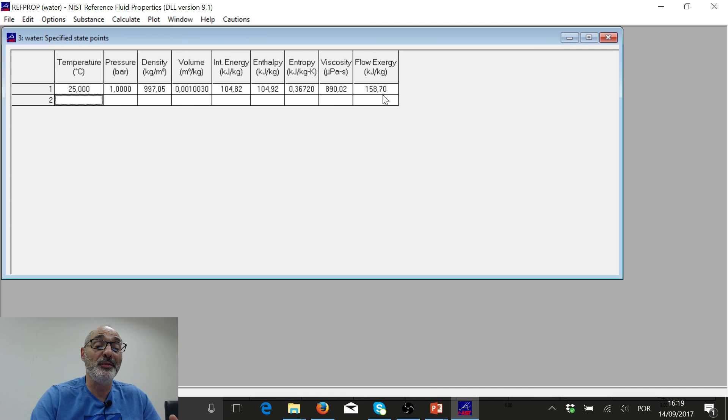Flow exergy and so on. You can have viscosity, for instance. If you calculate the specified point, 25 degrees, 1 bar, you have everything that you need: internal energy, enthalpy, entropy, viscosity, and flow exergy. I'm just showing how I obtained the thermodynamic properties. It's very easy. As I said, you can use any of these software packages. You also have free apps for your cell phone. I use one called Steam Properties. It's free to download. So you have a very large number of possibilities.

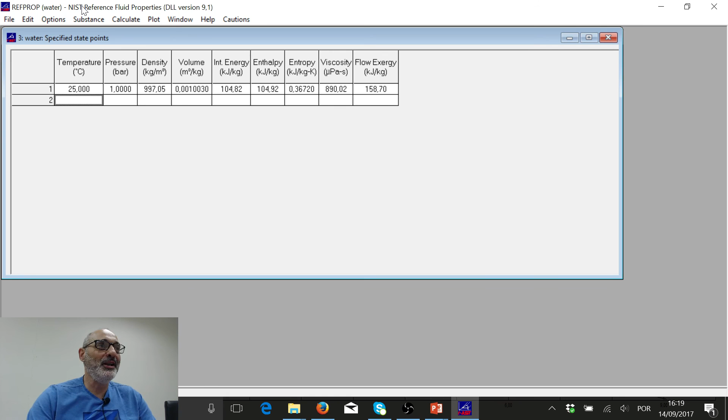Then follow me. By entering all the data that we have, 25 degrees, 1 bar, I obtain the enthalpy and also the entropy. Point 2 is 300 bar. I wrote 300 bar and the same entropy here. But if you wish, we can do it here. Let's do it together. This is a kind of tutorial class.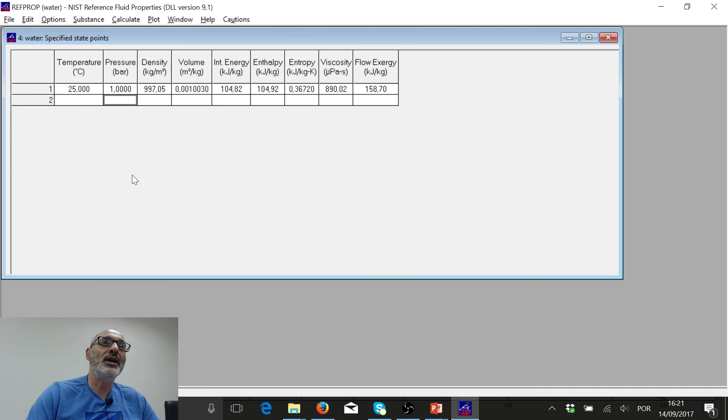So I'm going to calculate specified state points. My point 1, if you remember, is 25 degrees, 1 bar, and I got the enthalpy, which I'm going to need for the calculations, and also the entropy. Point 2 is at the working pressure, which can be 120 bar or 300 bar. Let's say I'm going to use 300 bar here. This transformation is isentropic, so we are at 300 bar, and the entropy is the same.

So I write 0.36720. Enter, and you have all other properties. Then we go up to 300 bar, 1,000 degrees. I got the enthalpy and the entropy. Then we expand that in the turbine to 1 bar, and the expansion is isentropic, so the entropy remains the same, 7.2880. Enter, so we have all our properties. What we need are the enthalpies here. I'm going to show that.

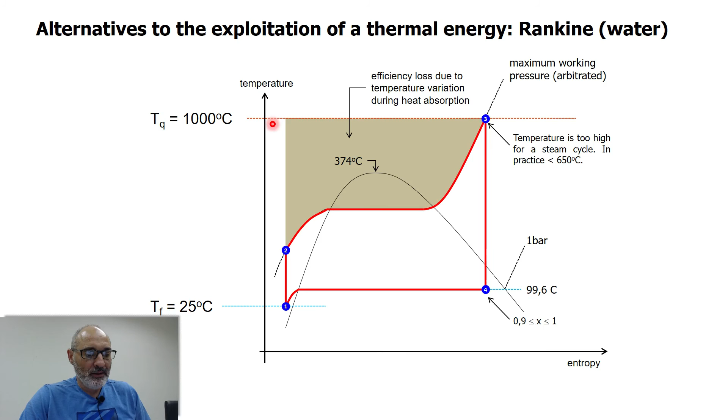Does someone have any doubts about this? Because that's the only occasion where I'm going to show you this. For the other calculations, I'm just going to show you the results. I'm not going to show you how you can calculate this. So, sorry, my presentation.

Here are all the calculations. I made some calculations at 300 bar to show you an important thing: my temperature here is limited to 1,000 degrees, so I'm not going above this blue line. But if I increase the pressure, I know, because I already did the calculations, that my cycle is going to be more efficient. So if I move this point 3 to the left, I have higher and higher pressures. I did 300 bar here, and we're going to end up, for instance, here.

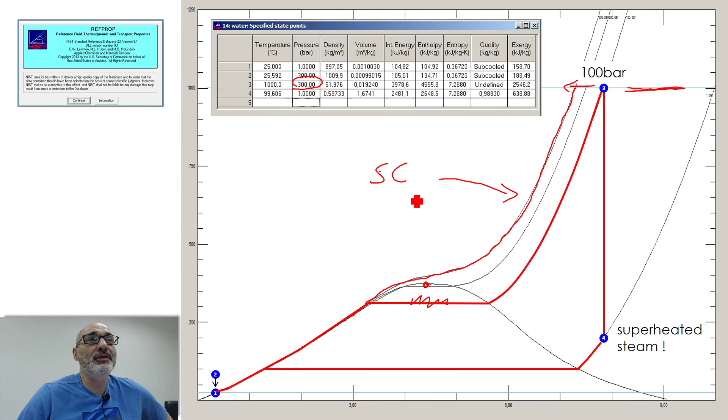In this region you have boiling water, but above a certain pressure, above this critical pressure here, you don't have phase change. You have supercritical fluid. Remember that I was talking about supercritical CO2. That's exactly the same thing, only the pressures and temperatures are lower, and the advantage is better efficiency. A supercritical fluid, as I showed you, is a fluid for which the density of the gaseous phase is equal to the density of the liquid phase. Below the critical isobar you have liquid and gas with very different densities. When you increase the pressure, the densities get closer and closer. When they become equal, you have a mixture, like an emulsion of liquid and gas.

That would be a supercritical boiler, and the more advanced power plants are starting to use supercritical cycles or transcritical cycles also. This is a tendency that you can observe that contributes to the increase in efficiency, as I showed in the beginning in that table.

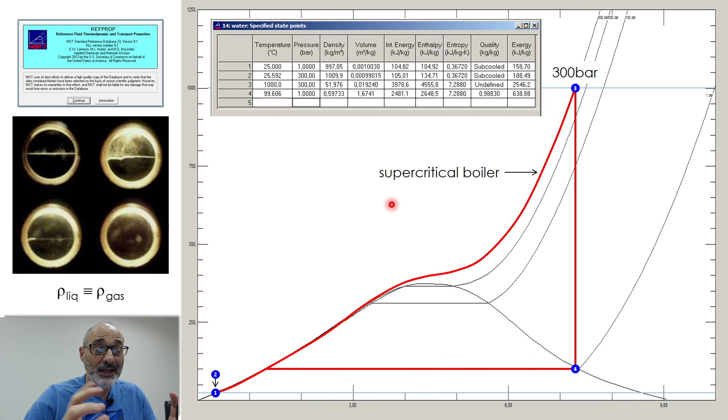Let's do the calculation. Let's apply the first law of thermodynamics, because now we have all the enthalpies, and calculate the efficiency of this cycle, 300 bar. We need to calculate the amount of work and heat exchanged. I'm going to do this very step by step in order for you to follow, and then for the next implementations of the power cycle I'm going to move a lot faster, because in principle you have all the more important ideas. We start from the data, the enthalpies of points 1, 2, 3, and 4, and we're going to apply the first law of thermodynamics for an open system.

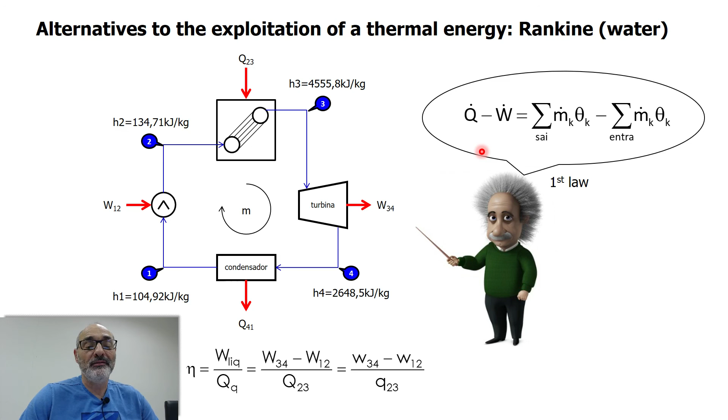Remember, I explained to you what's an open system. So we're going to start by defining the control volume around the turbine, confining the turbine, and we apply the first law for this control volume.

We know that the amount of heat is 0 because it's isentropic. There's no heat exchange between the system and the environment. It is isentropic, but there is work. So if we apply the first law, we get that the work W34 equals the enthalpy change.

So we have this in terms of specific numbers, H3 and H4. H3 is here, H4 is here, and the next thing is we do that for other systems.

So we do that for the pump, the same for the pump. We put our control volume here, we apply the first law, and we get that the work absorbed is delta H. It's always delta H, okay?

And for the last, we put the control volume around the boiler, apply the first law. Here there is no work, the work is 0, but the heat absorbed is not 0. Then you get the heat absorbed in specific terms is delta H, the same thing.

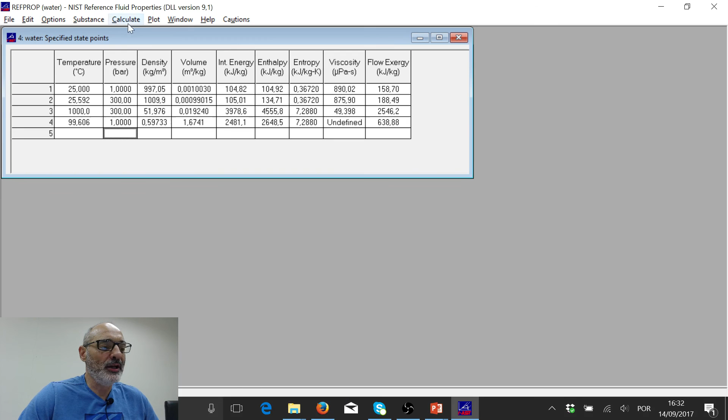Well, it's exactly the same démarche. So for the last time, we go to our thermodynamic property calculator. We choose the substance; air is a pseudo-pure fluid, and we calculate the point: 25 degrees, 1 bar. Then the working pressure can be 20 bar, same entropy, and so on and so forth.

3.8843, etc., etc. The same thing—I did that for air, and I got these enthalpies: H1, H2, H3, and H4.

I don't remember, somebody asked me about the temperature here. In this case, we got 300, 303 degrees. So you see it's not as hot as 1000 degrees, but it's still very hot, carrying a lot of energy that is being rejected to the atmosphere.

So the idea of combining a gas with a steam cycle is to somehow recover a certain amount of this energy here. So let's complete the calculations for the Brayton cycle.

It's the same story: we put control volumes in the compressor, combustion chamber, and turbine. We calculate the works—the turbine work, the compressor work—and the absorbed heat, and we replace these in the calculation formula, and we get 56.18%. This efficiency we must compare with Rankine, which we have just obtained, 42.5.

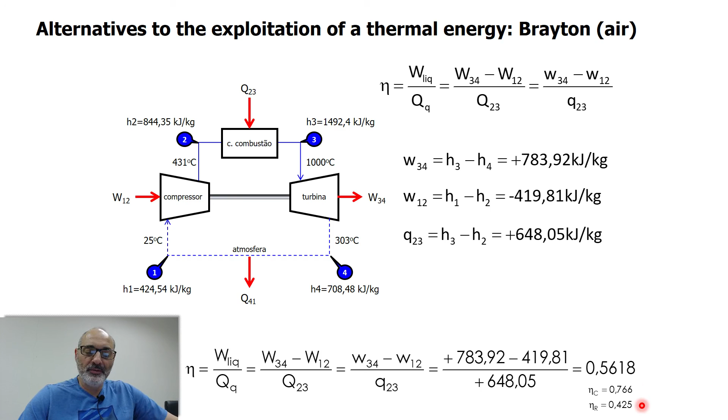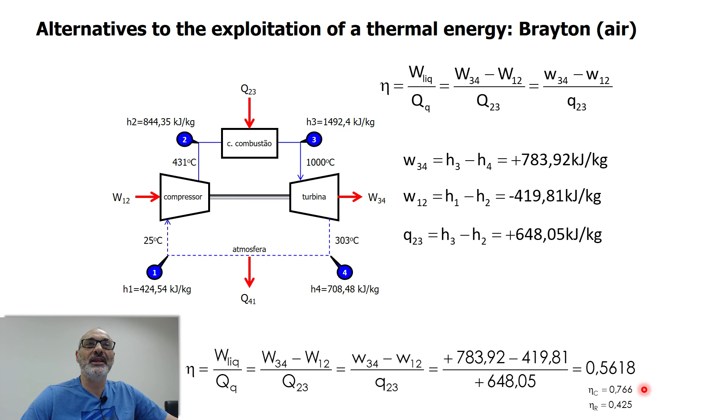It's better, but it's still significantly below the Carnot efficiency, 76.6. So now, this is just to show you the actual Brayton cycle, and you see that the temperature is very, very high.

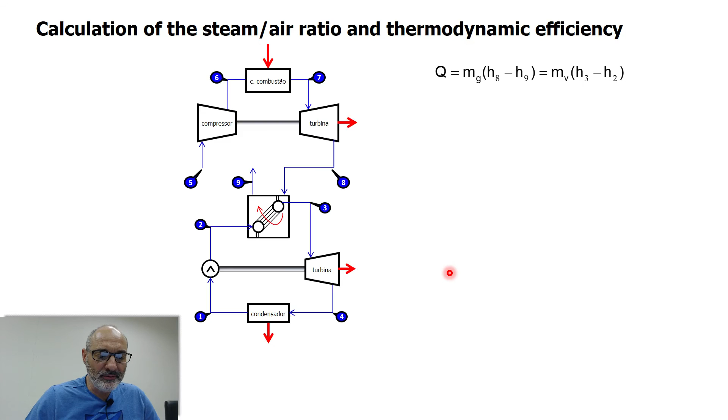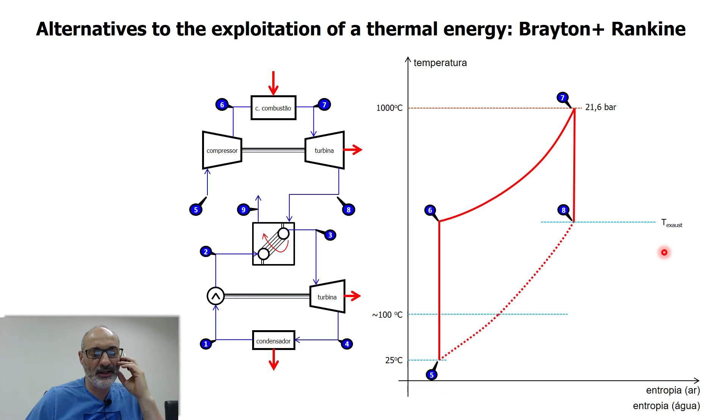You see that I'm going back a lot of slides just to remind you the first efficiencies that I showed you. Remember, in 2100, it is expected to attain efficiencies between 60 and 70%. Let me go to that last slide here. Yes, so 76 is the maximum theoretical efficiency. We got 62. That's fairly good.

Actually, if we can do better than that, I'm going to leave you a suggestion. If you are interested in playing with these equations, you could try to change your cycle, because the Rankine cycle is terrible for 1000 degrees. So you could try to change your Brayton cycle, for instance, instead of compressing from the lower pressure directly to the higher pressure, 100 bar for instance, you could compress to a lower pressure, for instance from 1 bar to 50 bar or 20 bar, a pressure lower than the maximum. Then you absorb heat to attain 1000 degrees, and then you reject. You have a different cycle here, which can be more efficient than the one that I just calculated. That's a suggestion that I leave with you.